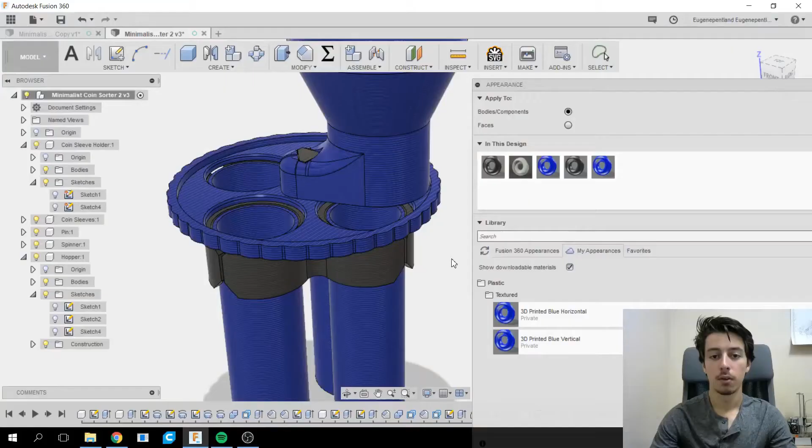Okay, so this is what the final result will look like once you are finished. You can see that there's this texture on all of my parts and it looks like it's 3D printed, and I can actually adjust how thick those layers are to make it look closer to having a high or

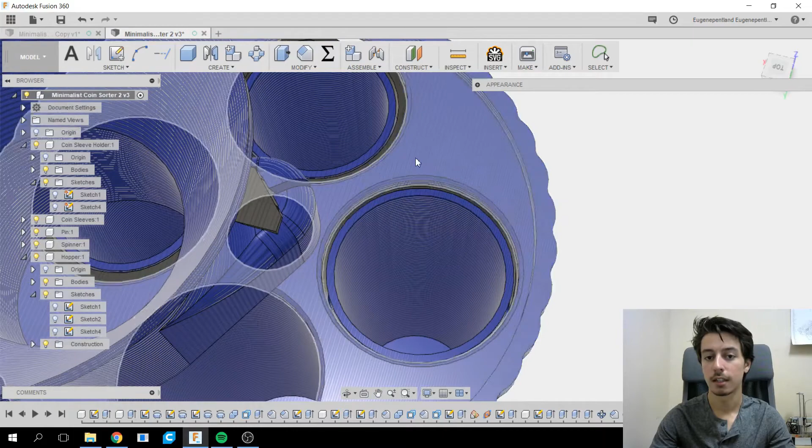low resolution. The only thing about this is that top surfaces are never going to look exactly correct because it can't do a perimeter around all of those certain edges, and also certain curves will not be going the right direction because they move along two axes and the texture cannot account for that. But for 90% of what you'd be looking at, it works perfectly.

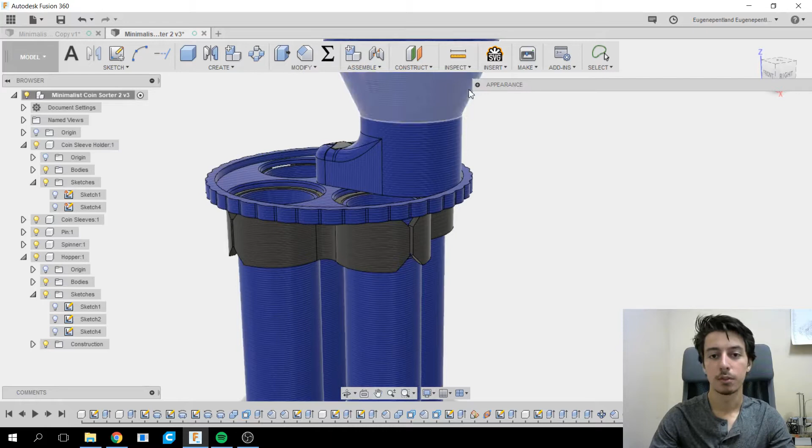Okay. So the first thing that we need to do is I am going to clear all the appearances that I have here. So I just hit A on the keyboard and I'm going to go to unassign and delete. Okay, so now I have it down to the base model, and now we need to add some appearance into here. So I'm going to open up the triangle where it says library, and then I'm going to click on

Fusion 360 appearances. From there I'm going to click the drop down menu for plastic, and then I'm going to go to opaque, and I'm just going to pick a color that I want. So let's do red, and that should be good. So now what we have to do is add this appearance to the objects that we want. So we're going to have body / component selected.

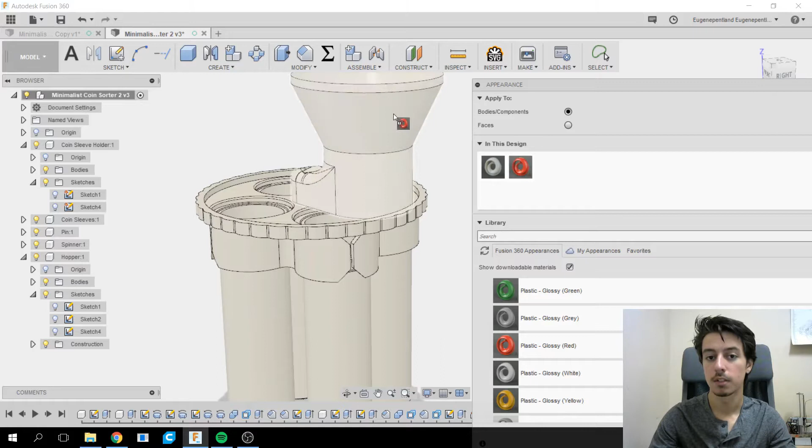We're going to take the appearance that we want and click and drag it to each component that we want to be that color. So I'm just going to do it to a few different things, and then I'm also going to grab one more color. I'm going to grab a matte black, and then I'm going to drag that to some of the objects as well.

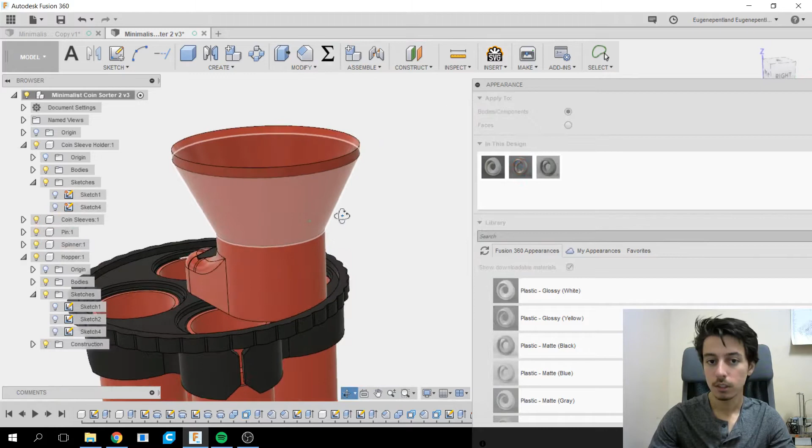Okay, now that that's complete, we have to add the texture to the surface. So to do that, we have to add texture mapping, or what's called bump control. So we just right click on the appearance that we want to edit, we click on edit, and then down here we're going to click on advanced, and we need to enable relief pattern (bump). So we're going to click this little checkbox, and it's going to prompt you to select what texture that you

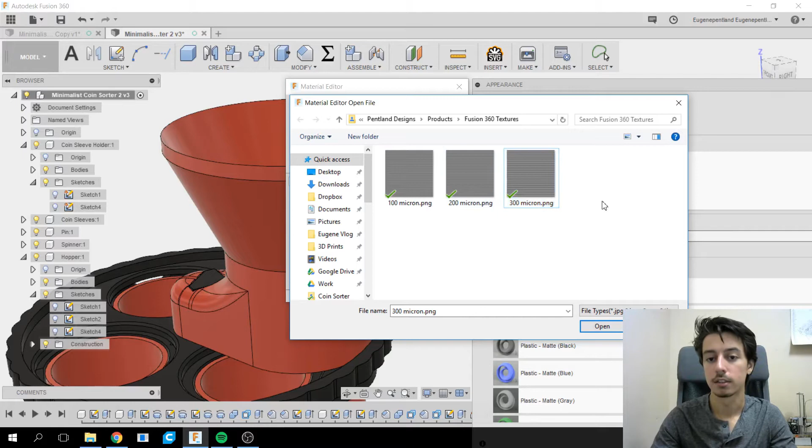want to use. So in the video description, I'll have a link to where you can get these 3 files that I've made. They're just a series of a whole bunch of horizontal lines, and each micron level, it's not exactly micron, just has thicker or thinner lines, making it appear to have higher or lower resolution.

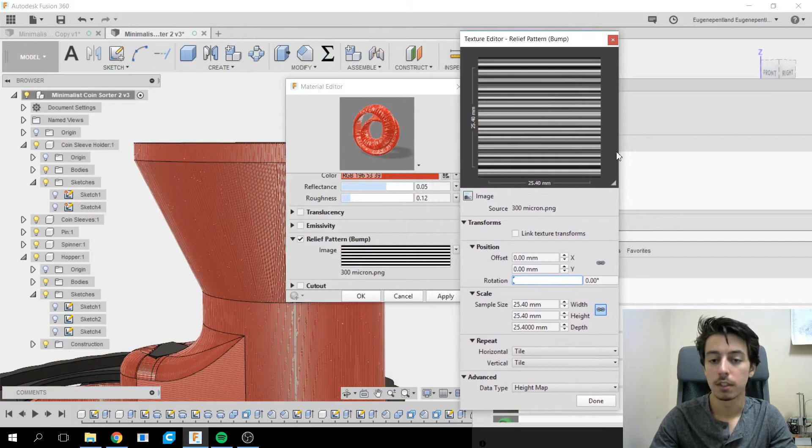So as you can see here, after applying that texture, it automatically gave it some kind of appearance, except these lines are not going in the correct direction. So we need to edit that. So now if I just double click on where it says image, this drop down menu appears and we can edit the way that the pattern actually moves.

So if I just scroll down, we're going to go to rotation, and then if I just click and drag this, it rotates that, and we're going to set that to be 90 degrees.

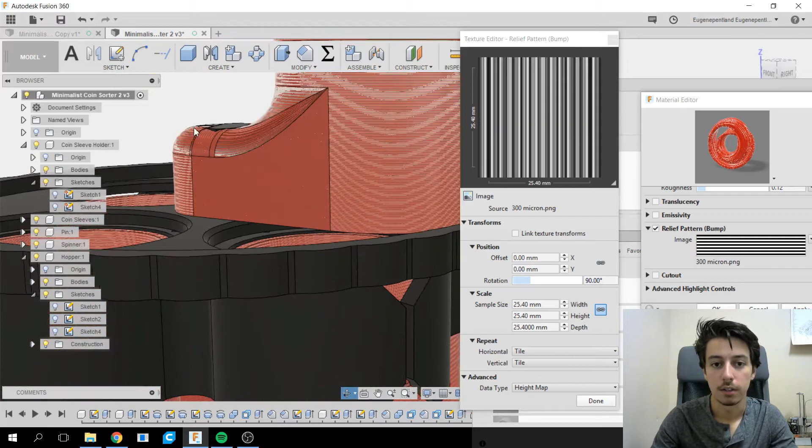Okay, so now that looks good in most spots, but say right over here, the layers are still going in the wrong direction. So we actually need to make a duplicate of this and have one appearance going in one direction and one appearance going in the other, so that way it matches up everywhere.

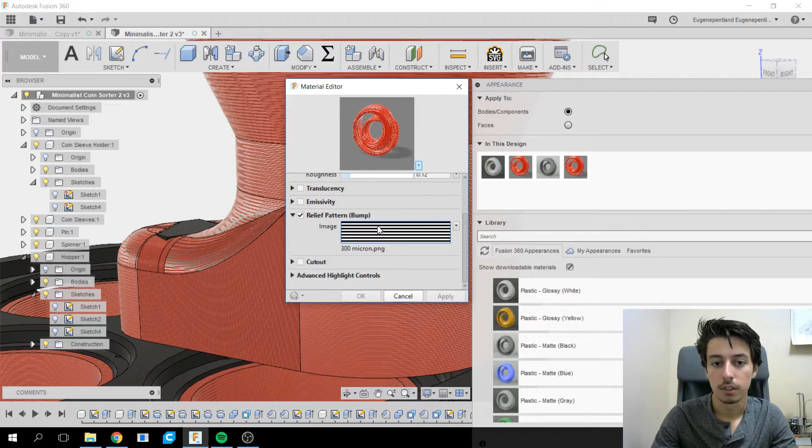So I just close out of that, I hit OK, and I hit apply, and I'm going to close out of the material editor. Now I'm just going to right click on the appearance that we just made, I'm going to go to duplicate, and I'm going to right click, edit, advanced, and then we're going to double click on where it says image again, and we're going to disable the rotation on this and just set it back to 0. Now we're just going to click done, and we're going to click apply, and then cancel.

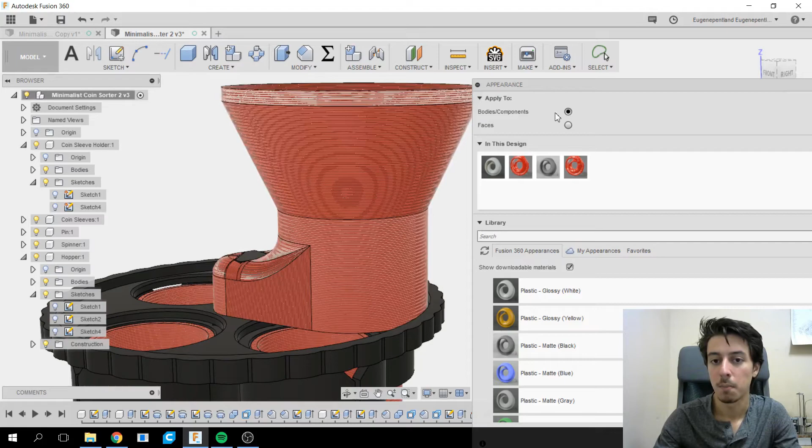So now nothing changed because we didn't apply this new appearance yet to the faces that we want specifically. So where it says apply to, you're going to change it from body / components to be faces. And now you're just going to click and drag this new appearance into the specific spots that you want to change the direction of the layers. So now you can get it so everything flows properly and looks correct.

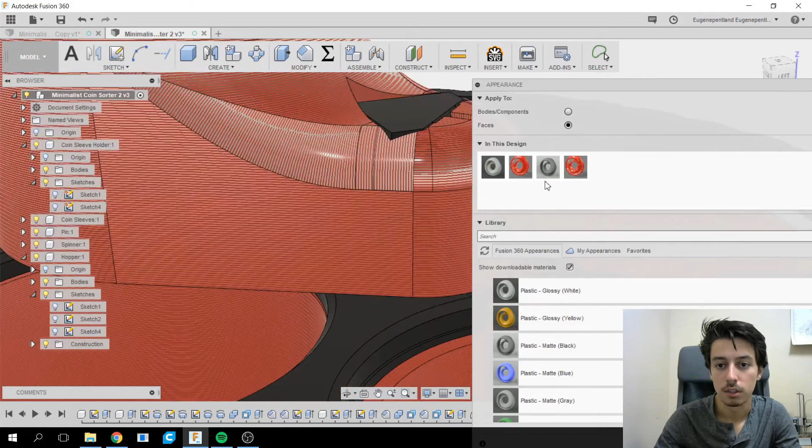So that all looks good over there, and now I just click and drag it to all these other different surfaces just to make sure everything lines up properly. And that looks pretty good. So all the red seems to be complete. And now we just need to repeat the same process for the black section. And now that should all be good to go. You now have a part that looks like it's 3D printed.

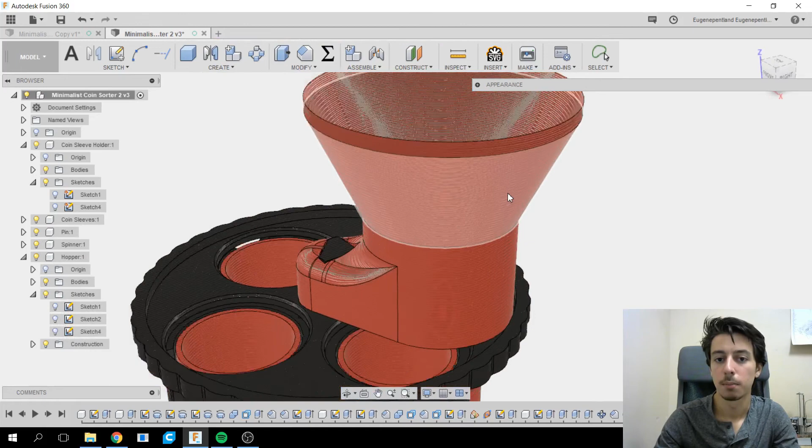But as of right now, in just the regular model viewer, it doesn't end up looking all that nice. So we're actually going to go over to the rendering engine and see what that looks like once it's complete. So I'm going to click on model, I'm going to go to render, and now it gives you a little bit better idea of how it will look once it's done. So I'm just going to move the camera to be roughly the way I want it to look, and then click the in-canvas renderer.

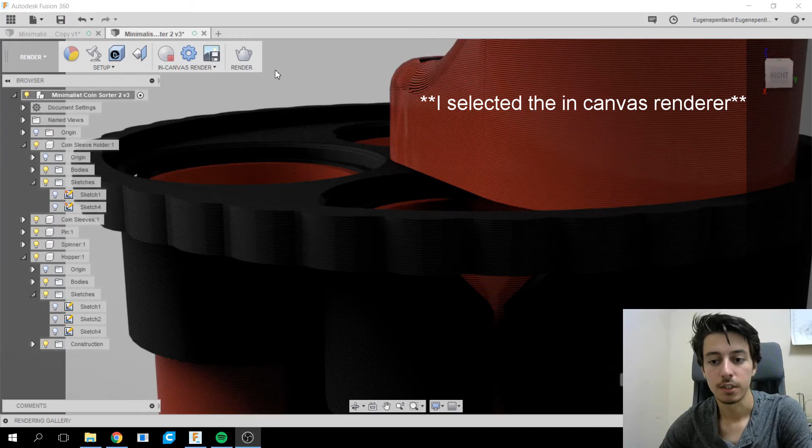Okay, so it's been rendering for just about 200 seconds now, and you can really start to see the layers showing up on the side walls over here, and just ever so slightly on the edge of this spinner right here.